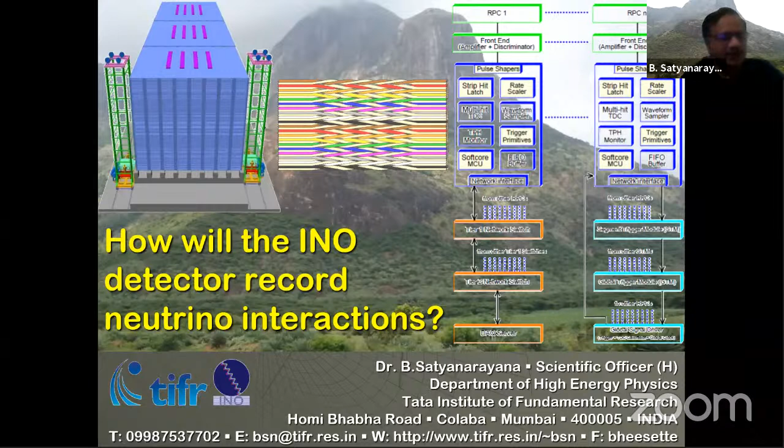Okay, so the title of my talk, as you see on the screen, is how will the INO detector record the neutrino interactions? The title is motivated because you have been hearing about neutrino oscillation, neutrino interactions, and various other phenomena. But when you really build INO, the big detector, whenever neutrino interactions do happen in your detector, they are reasonably rare and not in big numbers. So how will you actually end up recording them, how do you know that your detector is live and working to record the data, and how do you know that the detector is recording it accurately, in the sense that it's not a spurious event and so on. Okay, so that is the motivation for this talk.

What you see on the left, you will see this picture many times later, is the so-called iron calorimeter detector of the proposed INO project. And on the right, I gave symbolically some blocks of what it looks like, some kind of electronics.

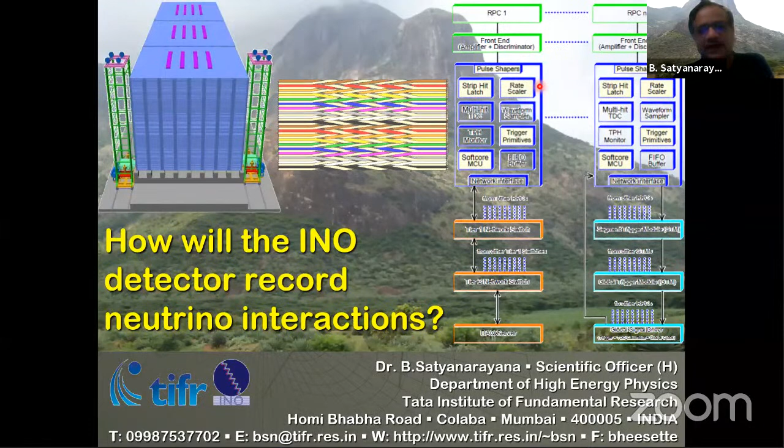And of course, this we all know is a kind of cable. Some of us call it flat cable because it is flat and there are multiple conductors. So the point is, when neutrino interactions or any interesting phenomena happen, how do you actually record them? So that is the theme of today's talk. But obviously, we must start when you talk about recording.

Of course, we should go back all the way to 1956 and look a little bit, just to get the context of how Reines and Cowan, the guys who actually discovered the neutrino in the very first discovery experiment in 1956, did that. Looking back today, it looks like a very simple, rudimentary experiment, but nevertheless, the kind of numbers they obtained with their measurements are phenomenal. Look at this at the bottom.

So of course they used anti-neutrinos coming from a reactor. So these are incident anti-neutrinos coming through this port, and this is your nuclear reactor. And what they have is a detector like this, which is made of about 200 liters of water and about 40 kilograms of cadmium chloride. These circular objects are, of course, photomultiplier tubes, about 5 inches in diameter, and about 110 of them are used.

So when an antineutrino comes in and gets into the volume, which is a scintillator volume here, you get an inverse beta decay. You get a positron here, which passes a little bit beyond in this detector volume before it interacts with an electron; they annihilate with each other, producing two gammas back to back. So this is the first event, the prompt event. This is what is given here: antineutrino with proton producing a neutron and a positron. Now, this positron with an electron produces two gammas, and you need to detect these two gammas first in order to say, this is my starting point, this is the prompt.

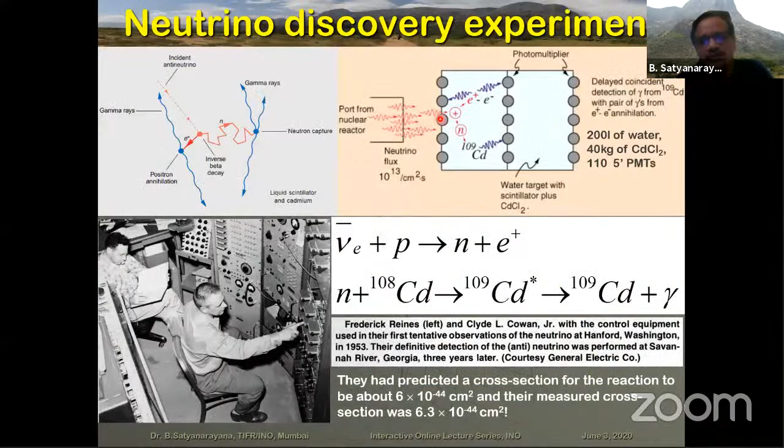So this is what I wanted to tell you. It all depends on how cleverly experimentalists put up an experiment. That is more important than using very high speed clocks, large memories and whatever. So that is the idea, but let us now come straight to decades later.

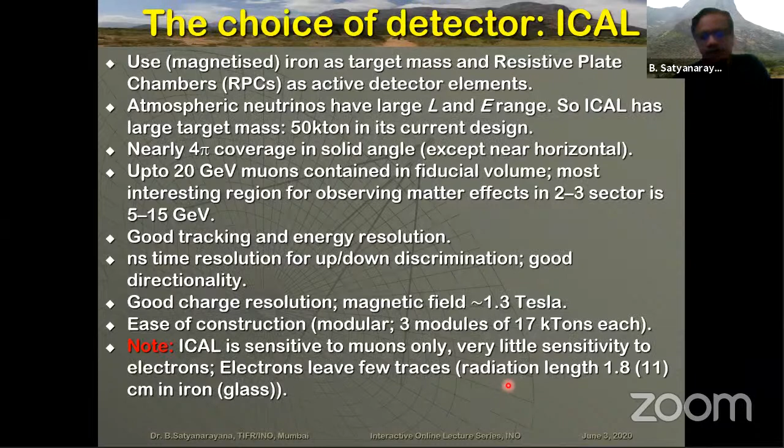So just to give a very quick overview of all this jargon that we keep talking about, the big detector, the dream that we want to build, is the iron calorimeter. So that is how this structure looks. We'll see, of course, more details about this. The so-called engineering ICAL. So before we build the big detector, we want to build a prototype which will give us confidence that we can actually build this. By the way, these are those 3 modules that I described just now. And even before that, we want to build a very tiny so-called mini ICAL detector. These 2 are, of course, in the graphics, but this is a real object that you see here, and it is actually operational in Madurai in our lab called Inter-Institutional Center for High Energy.

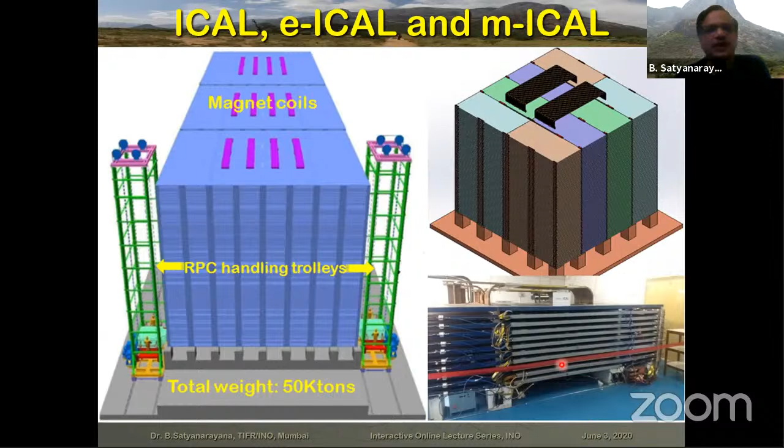So you keep hearing about these words ICAL. ICAL is the final big detector that we want to build. Engineering ICAL is what is here, the small one. You will see the specs very soon, and mini ICAL is what I said is right now operational. Just to give you a feel for what these numbers, sizes are, you can actually see a table here. Talking about the dimensions, the total dimensions are roughly 16 meters by 16 by 14.5 meters.

And you saw that it's a layered structure. There are 150 layers of iron, which is about 6 centimeters thick. There's a gap of about 40 millimeters between the iron plates where you are going to insert the active detector elements. This is the magnetic field. And Deepak mentioned the resistive plate chambers, nominally of the order of 2 meter by 2 meter size. And you'll be able to get tracks of these particles, let us say, at every 3 centimeters. Okay, you will see that the actual resolution for the position will be much better than this, because this is one track. If you send me, I'll be able to give you a position within 3 centimeters.

Okay, and of course there are other details here, but what is also important is when you say that RPCs are your main active elements, the question comes, how many of them? What is the total area that you are going to cover? Because there are 150 layers, let us say each one of them is 50 meters by 16 meters. So if I have to cover them, 150 into 50 into 16, you get 100,000 meters square of area. These are almost 15 soccer fields.

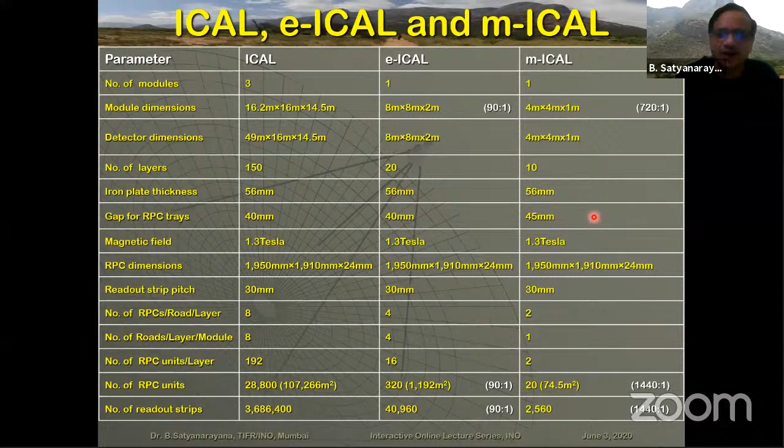And if you wonder what 4 million detector channels are, typically an ECG machine has about 10 channels on which the signals are received and recorded. So now you can kind of imagine what one is talking about. Compared to ECG signals, of course, these are about 1 million times more signals, but also 1 million times faster. So that is the kind of figure you should sink into your mind when somebody is talking about engineering, right?

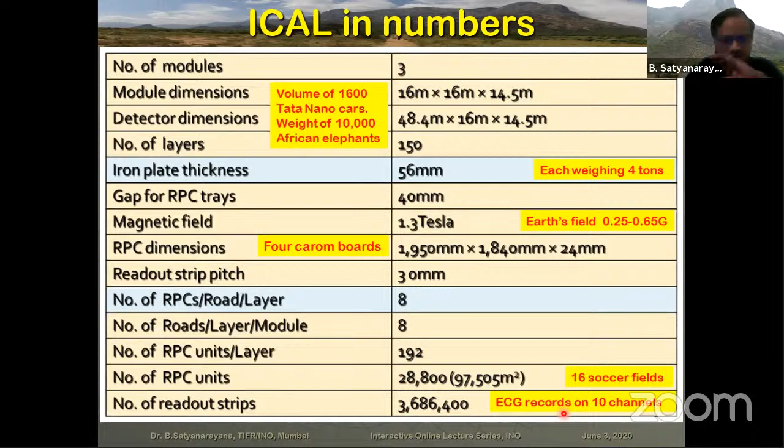Okay, let me see if I can show you. Okay, I can't find it, I don't know why, maybe I should.

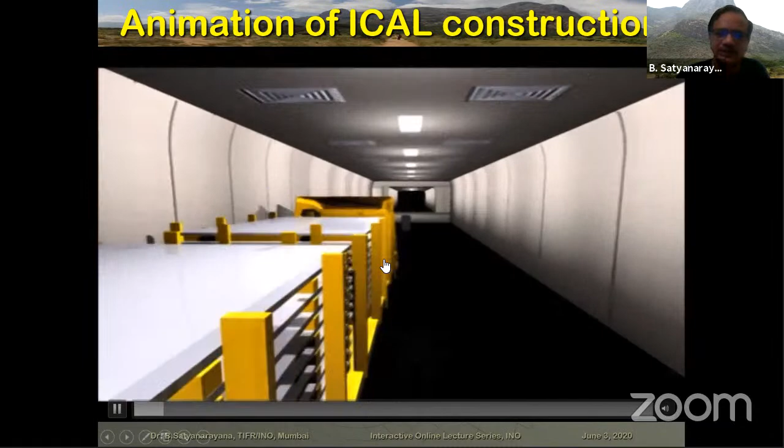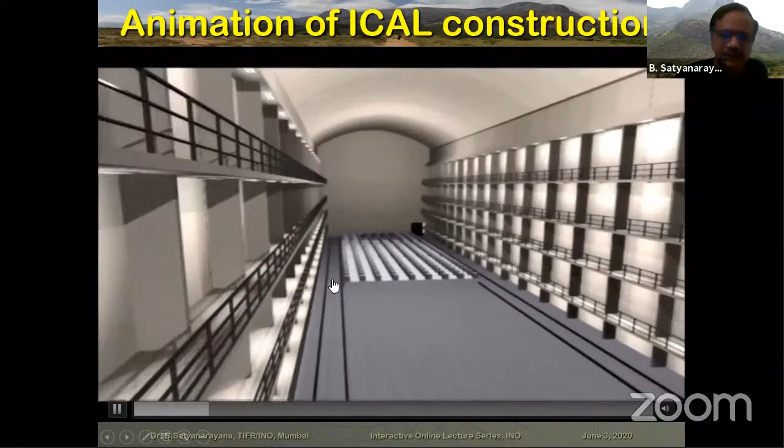Yeah, so just an animation to give you a feeling. So this is the 2.1 kilometer long tunnel, through which a truck carrying, let us say, iron plates is going, and it is now parked at the bay where it is supposed to be waiting. And now you can already see that you have concrete pedestals on which you want to build the first module and the second module and the third module, putting them together.

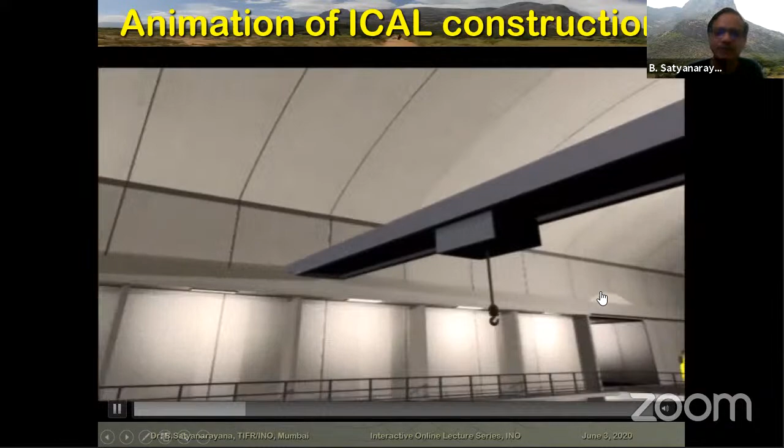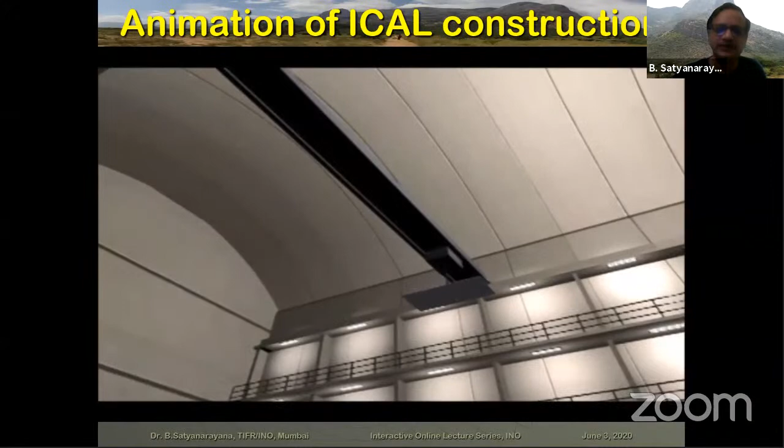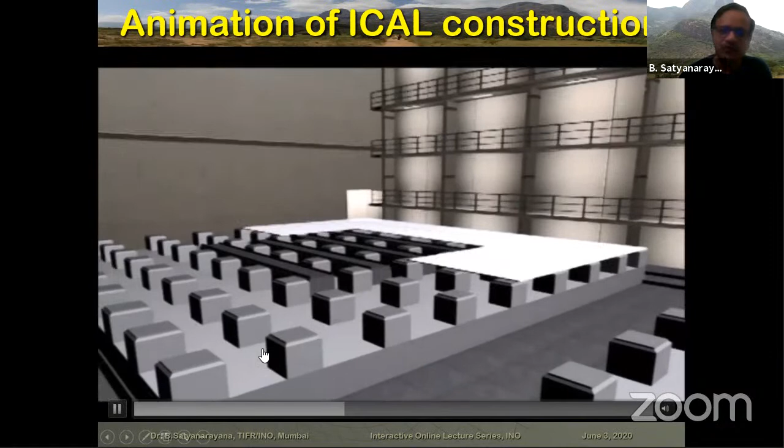And here you can see the iron plates are being picked up by a crane, and they're going to be placed one on top of the other, and it is always built layer by layer, as I said, keeping spacers between each one of them to ensure that later on you can insert the active detector. Of course, here every tile and every layer is put in a few seconds, but it takes 3 or 4 years to actually build even one module.

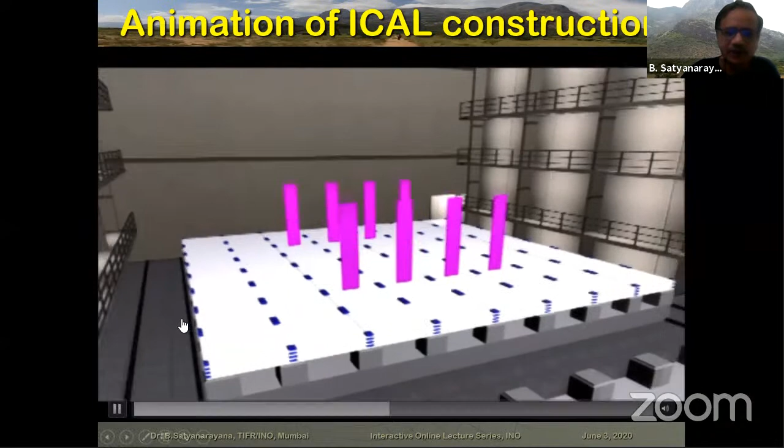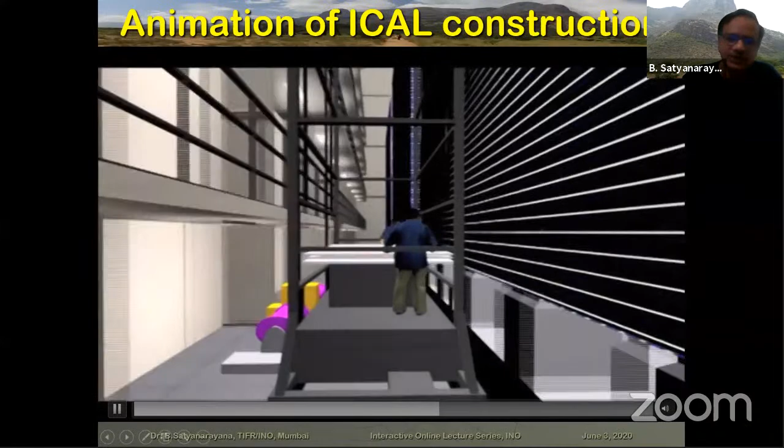Now you can see the purple color stuff, the magnet coils have already gone in, and these iron plates are special because you can kind of push the copper coils through them, and you can see very quickly modules 2 and 3 have come out. Now these guys are taking in a trolley the fully fabricated particle detectors called resistive plate chambers, and they are pushing those into those gaps like pigeon holes, one RPC at a time, and then they'll go to the next one and so on.

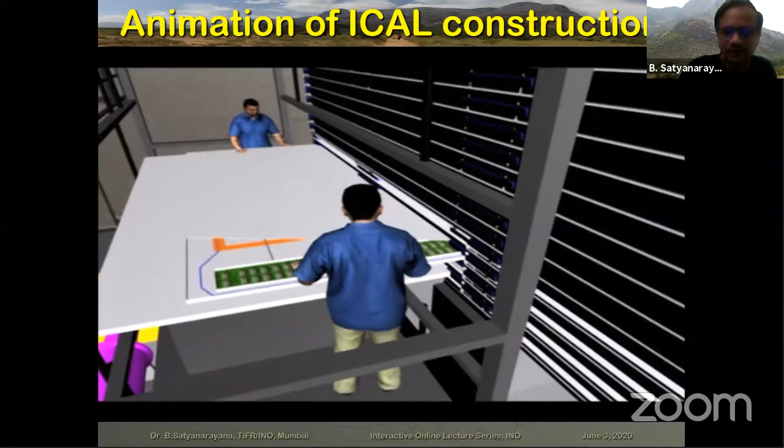Okay, so as I said, the whole animation of course lasts only 10-15 seconds, but it's a long process when you want to build such detectors. So this is what I wanted to give a feeling of, when you talk about large area RPCs you're going to use in a big number, how big this big is.

And of course, there are many differences depending on what the electrode material is. Most people use glass or bakelite. What is the gap between the glasses, how many gaps and modes, and so on. We'll talk about it, but please remember, this is the kind of challenge that you have. And the R&D started quite some time back, almost 20 years ago; obviously there was no RPC in the country and we really had to start from scratch.

Okay, what is RPC? It comes under a class of what you call parallel plate counters, which were really invented by Keuffel in 1949. This class of counters is called PPCs, parallel plate counters. And imagine, at that time he was talking about machining 2.5 millimeter gaps. This is a very classic experiment. But what I really want to show is the uncertainty in reaction time, something like a timing resolution, which already as a function of the voltage was hitting nanosecond kind of resolutions at that time.

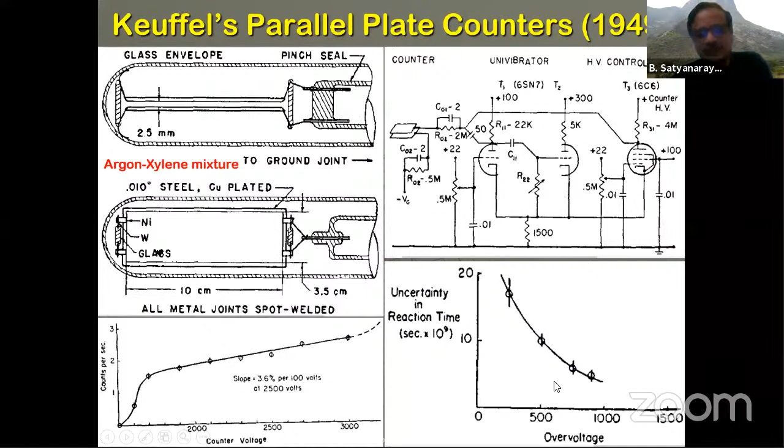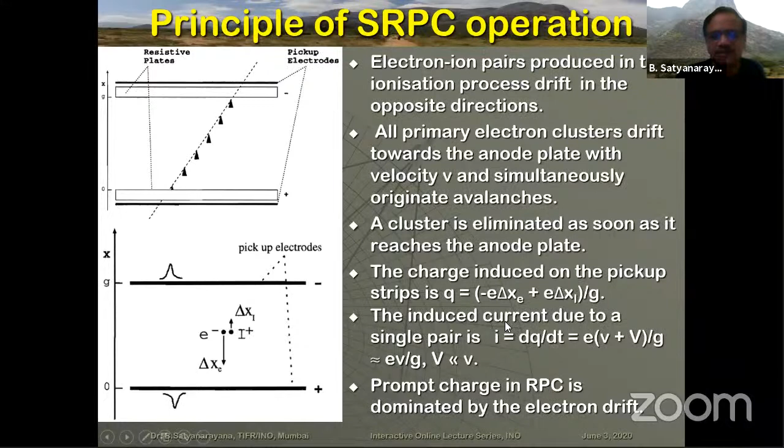Okay, so the signal that you are getting on the pickup panels is mostly contributed by electrons. A little bit about how you control this avalanche. You use, as I said, a 3-mixture gas. R134A is mainly the ionizing gas, and R134A is also an electron affinity gas, which can capture the free electrons produced, and you want to localize the electrons rather than spreading the ionization to the entire chamber, which is never a good idea, because then you lose the position resolution capability.

Now, these two reactions also keep happening. There could be electron attachment, which is given here. It could also be recombination of the ions and electrons produced, especially before they start their journey. In both cases, you will produce photons, and those photons can induce streamers if you don't contain them properly. So isobutane is used to kill these photons, especially high energy photons, so that they don't produce further ionizations laterally in the gap.

And SF6 is used to contain the gain of the detector, so that the streamers are avoided. So these 3 gases you use in some proportion, which you have to study to optimize, such that you get good gain. At the same time, you also avoid streamers, because they can spoil the longevity of the detector as well as the position resolution.

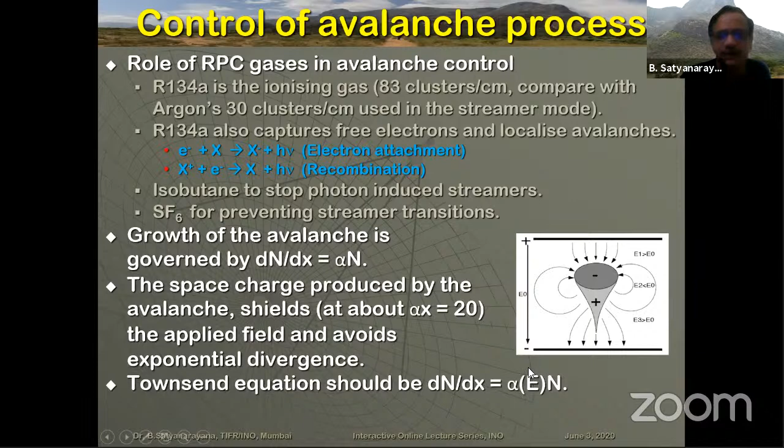But depending on whether you are close to the electrodes or close to where the electron cloud is moving, the fields are quite different: in this area it is larger than the uniform field, and at the center it is slightly smaller. But you don't want to reach either limit, and you want to maintain the avalanche growth in such a way that it doesn't turn into discharge. So the Townsend equation, though we say it's alpha n, alpha itself depends on the field. So you may have to write alpha(E) n.

Now, the same RPC that we have described can be operated in the so-called avalanche mode, which is a proportional, semi-proportional mode, which means I operate the gas mixture and high voltage such that when ionization takes place, as in the picture I described before, the avalanche starts moving. When the electrons move to the anode, you can see that you start neutralizing a very tiny place here. The ions reach much later, and when they reach the cathode, some of this local small area gets neutralized.

When that happens, the field which was at the applied uniform field drops suddenly, and you will find that the avalanche stops. Now, the electrostatic flux inside is varying, because one is the uniform field, and the other is the change of field produced by the movement of electrons here. That change in electrostatic flux is what induces signals outside the electrodes, using Ramo's theorem.

Now, in the avalanche mode, the signals induced on the pickup panels are relatively small, of the order of about 1 picocoulomb. And the gain, compared to the number of primary electrons, the total avalanche, is of the order of about 1/10 of a billion. These are good in that the charge is less, which increases the detector lifetime, but the signals are small, so you may have to use amplifiers outside, and this is the typical mixture and so on.

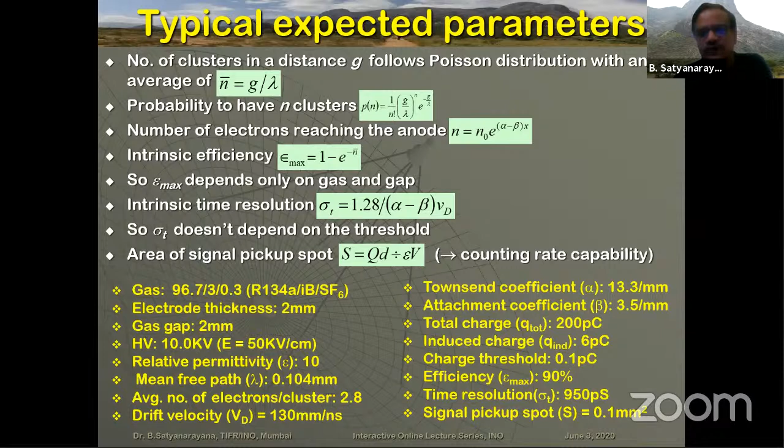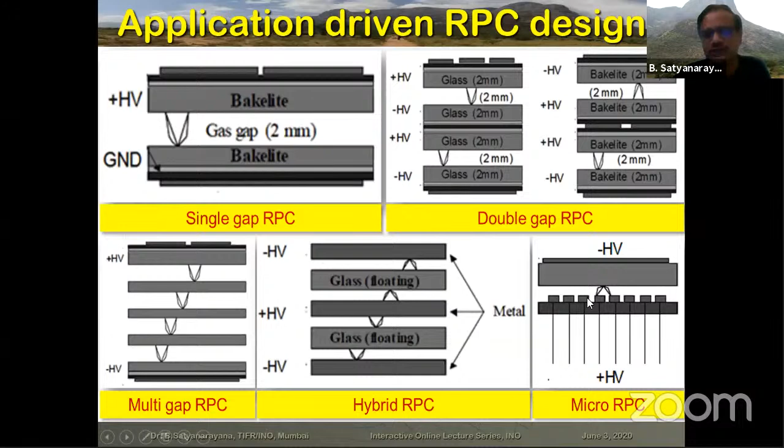You could also make the so-called hybrid. Instead of using glass electrodes, you could also use other metals. And there is also the so-called micro RPC, in which you make one of the electrodes segmented, and then you can get much better resolution. Maybe you can use it for X-ray detectors and so on. This is called micro RPCs. These are some geometries. How do I make an RPC?

You want to maintain the gap very uniformly, because when you apply voltage, the field depends on the gap that you are maintaining between the electrodes. And if the gap is not uniform, you will get different fields at different positions, which means the gain is not uniform across, right?

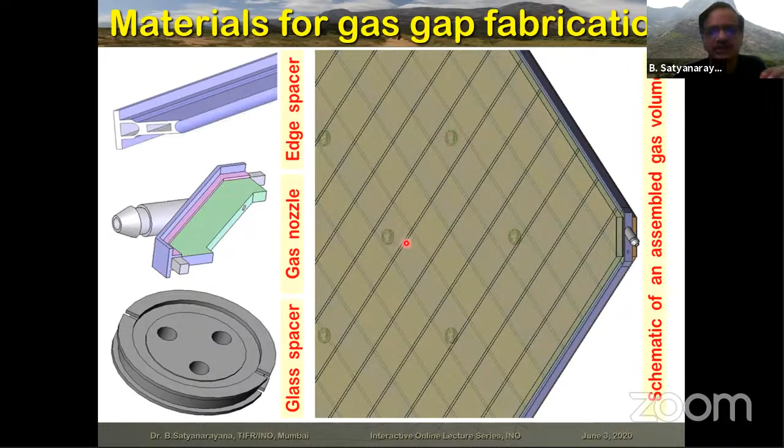So when you make the actual RPC, in this cartoon you can see these are the spacers that cover all four sides. These are the gas nozzles, and these are the buttons which are inside between the two glasses, right? I'm just showing you how they delimit the space between them.

Now, I mentioned some time back that the panels placed outside the gap are the pickup panels, which allow you to get the signals. You can see each one of them is roughly about 3 centimeters long. So as I mentioned, you put one such panel, let us say, on the top in this orientation.

At the bottom of the gap, you put one orthogonal to this, so that you get a pixel of 3 centimeter by 3 centimeter. When a charged particle passes through, you will be able to get such kind of resolution, right?

Okay. Now, when you build it like the way I've shown, you take glasses, you put them together, you put the spacers around, and you put the pickup panel on the top, and everything is put together. You put the electronics that is required to pick up signals from both fronts. You can call this the X plane, and you can say this is the Y plane.

And so this is a completely assembled so-called 2 meter by 2 meter RPC, and my colleague in Madurai is giving finishing touches before he is going to push this into a stack here. Okay. So, but it of course takes a lot of steps and a lot of care everywhere.

Now, when you put on such an RPC, you will see beautiful pulses like this. These are actually already amplified pulses, but you remember, this is the kind of voltage that you are talking about. This is already amplified to close to about 60 or 70. And the scale is about 20 millivolts. So you have roughly about 6 divisions, about 120 millivolts, but divided by 100 roughly. So it's about a 1 millivolt signal that you're going to see.

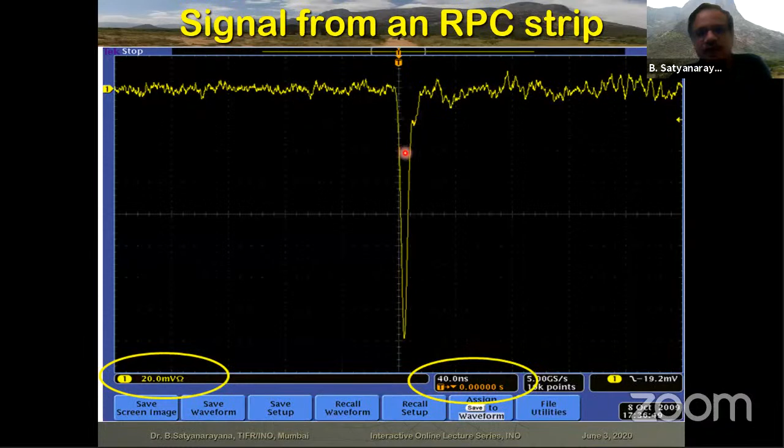And of course, you can happily track charged particles which are all available to you, which are cosmic ray muons, which just go straight through your detector. And as they pass through each one of the layers, your RPC, if it is 100% efficient, you're supposed to get a point there. You will see that.

What did it give you? Several years of running of all these prototypes gave you confidence that you not only understood how to design an RPC, but also their long-term stability. This is the most important. Remember, the ICAL experiment has to run for decades. Okay, so only when you're confident such a detector works very efficiently as well as for the long term, will you be able to install it for a neutrino detector.

Of course, when you build a detector as a student or a faculty, you are supposed to also look at whether each one of these parameters is working. For example, there are what are called IV characteristics, just like a diode. For example, if you construct an RPC detector the way shown, there is a glass here, there is a bottom glass here, there is a gap here, and if I apply voltage here,

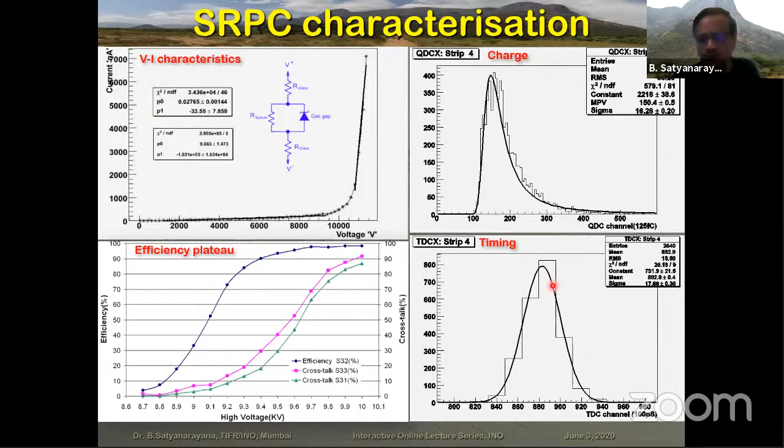ICAL detector. And as we said, the most important parameter for using RPC is also the timing. We should be able to discriminate whether it is an upgoing or downgoing particle. So I want to look at a cosmic muon telescope and see, with reference to a reference given by a scintillation detector, what is the spread of the timing that I see on the RPC? And I want to see this at least of the order of 1 or 2 nanoseconds, right? Okay, so all these parameters I need to do. You need to go even more.

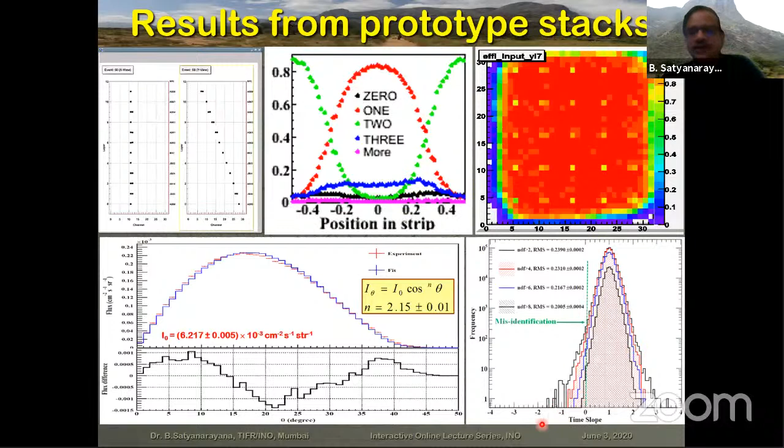I can also go ahead and try to see what is the cosmic ray flux, even using such tiny modules, and you can see these numbers come quite close to what is actually given by standard big detectors that were built. Since the main idea is to get the up or downgoing discrimination, on the surface, of course, you'll always see cosmic ray muons going only from top to bottom, and you can see all this coming only on the right side, and very little on the so-called misidentification. Okay, so this is what I'm trying to show.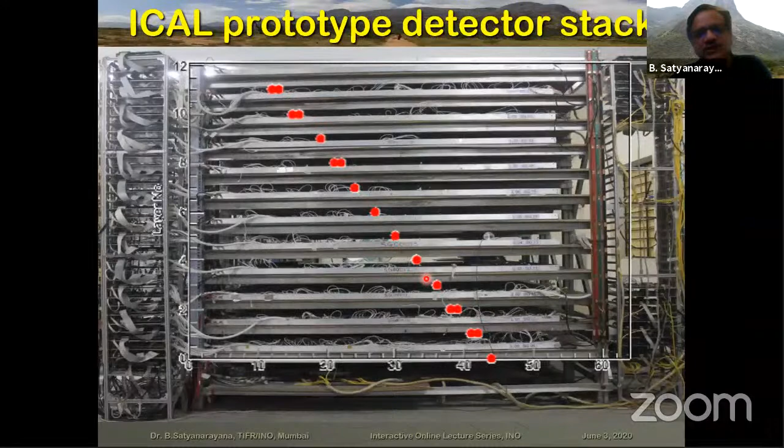If you have such a detector, in each of the stack, each of this layer, you're going to see one point, which is telling you the trajectory of the cosmic muon. Now, if I take each RPC for a long time, and if I project such particle trajectories, I can see something like what is called a tomography, and you can clearly see these white spots here are the dead regions, which are caused by the spacers that we use. Otherwise, you can see each of the strips, which is 3 centimeters, and there is a gap of 2 millimeters in between. It's very nicely visible.

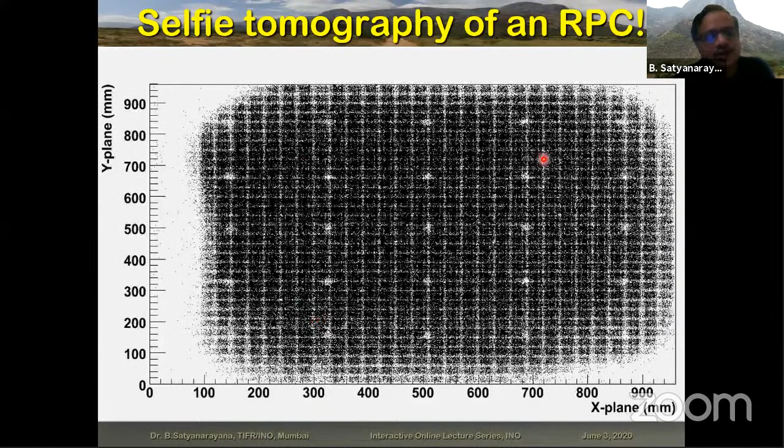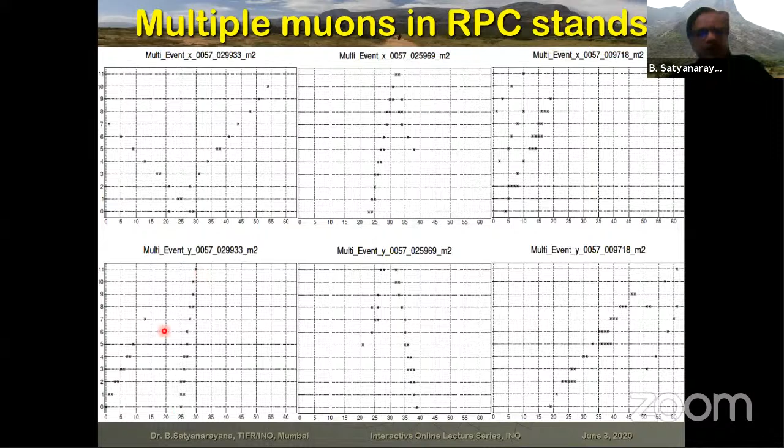Even with such a small detector, you can actually track cosmic muons, multiple muons within about a 1 meter by 1 meter detector, and you can see they're beautifully tracked. It's not just single muon tracks, but even double. RPCs are very good for detectors like ICAL, because you need very, very large area and very thin detectors, because they are only about 10 millimeters thin. And of course, with material, etc., it will go to about 25 or 26 millimeters.

And they're a very flexible detector. I can design the geometry the way I like. I can do XY, I can change the pitch of the pickup panels and so on. I can use the same RPC for tracking, calorimetry, as well as muon detectors. I get excellent timing, as I told you, and they are all built from simple common materials.

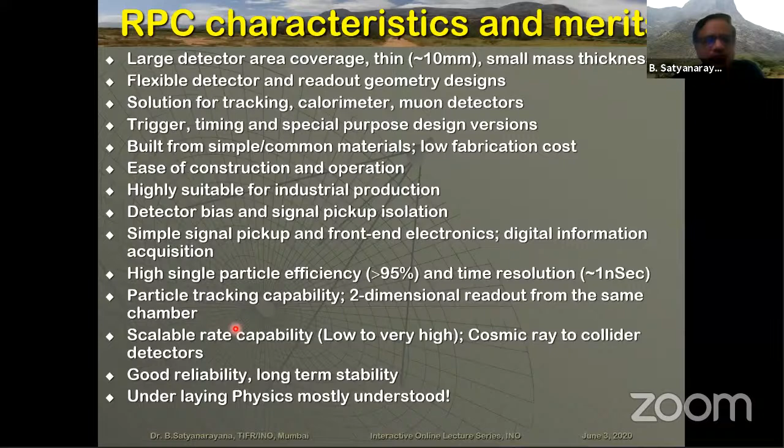Remember, high energy physics detectors are very large in number, very high in count, so you can't really build with very expensive materials. It's very easy to build, as you saw, and very suitable. Ultimately, you don't build 30,000 RPCs in your lab; you have to build in industry. And there are many other nice characteristics. I don't want to go into them for want of time, but RPCs are really nice, suitable detectors for such a detector.

Of course, since RPCs are based on gas as the detector medium, you also have to build so-called gas systems. Gas systems are the units which take those gases in cylinders, mix them in the proportion that you want and flow them through the RPCs. But remember, if you build the big ICAL, it will require about 200,000 liters of gas, and you can't really throw the gas into the atmosphere.

Of course it's not allowed, but even if it were allowed, it is a waste of money, right? So when the gas is mixed together and flown through your detector, after all, it is only used as a detection medium. It is not something consumed in that sense. So take the gas out and maybe clean it a little bit, because due to leaks and going through the pipes, etc., there may be some little contaminants, moisture, oxygen, or water.

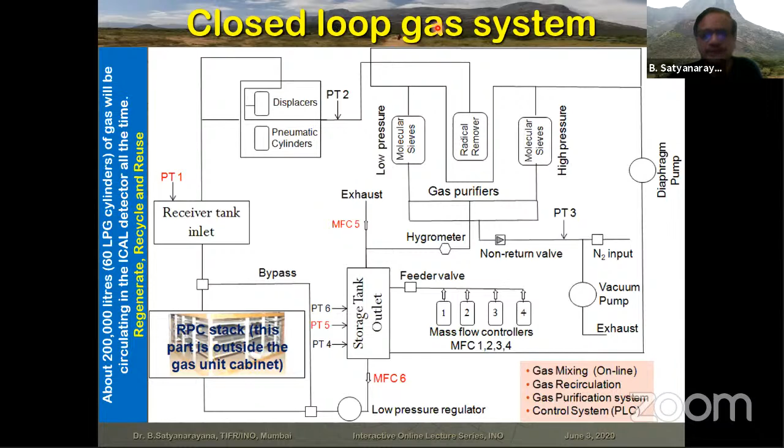Purify it using molecular sieves and other materials and push the gas back. So you will be using only a small percent of new gas every time. And this is what we call a closed loop gas system, and that is what has been developed. Now I'll skip some of these plots and slides because of want of time.

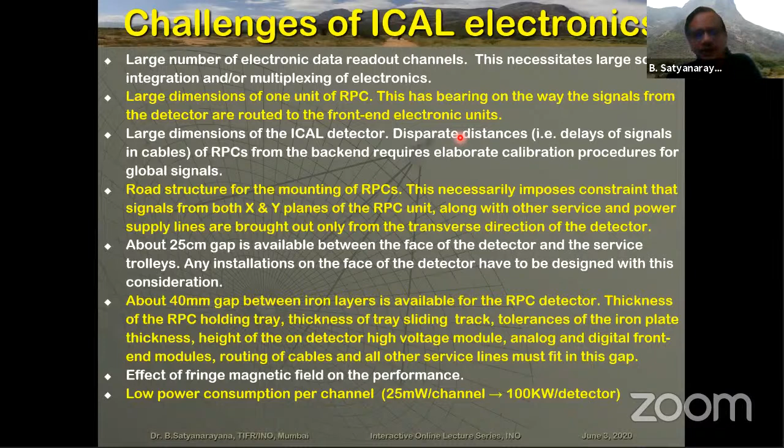Now I want to tell you a few things about what is required in terms of electronics. Remember, when you have a stack like this, what you are essentially asking is to see the path of the charged particles that are passing through. So suppose this is your ICAL detector. If I see either muons passing through or a neutrino coming in, interacting and producing, let us say, muon charged particles, you want to track them.

To track means, as it is traveling, you want to see the X coordinate, Y coordinate, and Z coordinate. Of course, the Z coordinate is given by the layer; you remember we talked about 150 layers, right? But X and Y are given by the pickup panels, which are orthogonal to each other. So the information I want is, at every level, which is one Z coordinate, one X and Y, another X and Y, and so on, so that you will be able to do a fit depending on what you want to do, with magnetic field or without. So this is one piece of information.

The other piece of information: as the particle is passing through, we should be able to get a time stamp, which means with reference to the passing of the particle, at what time the particle entered each layer. If it is in increasing order of time, then I know this particle is going from top to bottom, and if it is the other way, it is going from bottom to top. So I will be able to give you directionality capability.

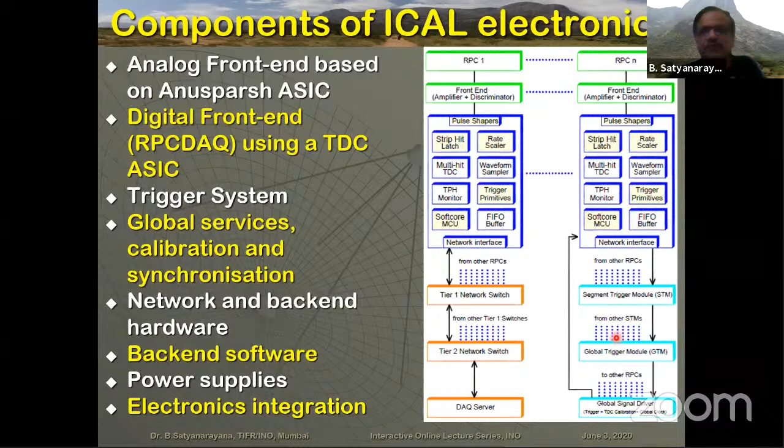But remember, you also have to generate what is called a trigger. Trigger is a system which is telling you when to record data. Otherwise, there may be a lot of other spurious events. You don't want to trigger them. And this is the most important system. So you need to also build an electronic system which is going to decide, based on the track of the particle or the topology of the hits, whether this is an interesting event or not interesting, right?

This is the electronics. So first things first, there will be students who will sit down and say that, okay, these are the requirements that I need. This is the amplification I need. This is what is required for my detector. And they make a block level diagram. Say I need an amplifier here. I need a comparator because I want to convert an analog signal into a digital signal, and so on and so forth, a multiplexer and so on. So this is the basic drawing that is required.

Very simple textbookish drawing. But what is important is, unfortunately, you can't go to the local market and buy an amplifier for you. Because the signals are very small and very fast, such very high bandwidth ICs or op amps are not available in the market. So some of our students go and sit and design what they call application specific integrated circuits. Starting from very basic electronic circuitry, they actually go and design this chip by themselves, okay?

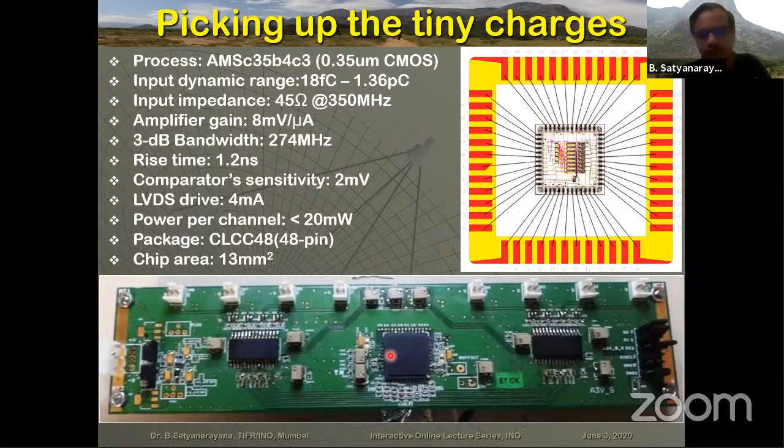And then we go to a foundry. Unfortunately, we don't have good foundries in the country. We go out somewhere, maybe European foundries, and get these chips fabricated. So these chips that you see here are not bought in the local market, but actually designed by the collaboration and manufactured in an IC foundry. Now you can really see there are a large number of such chips which are produced by INO within the collaboration itself, okay? Initially, we started with some hybrid chips. Now they are called ASIC chips, both for analog, for amplifiers, etc.

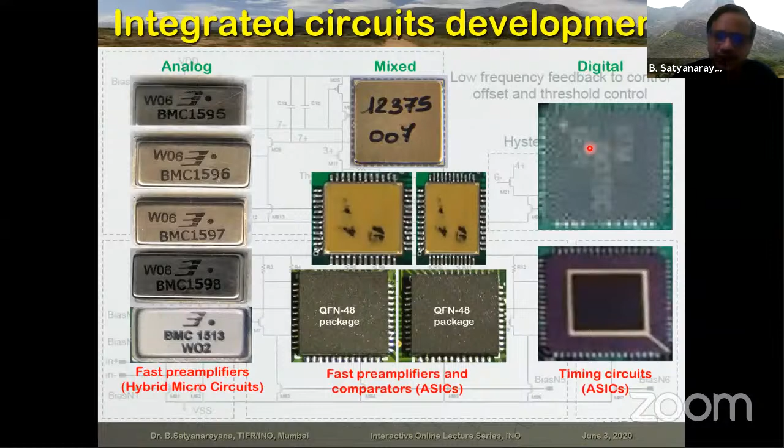So I should be able to measure this T1 here. I should be able to measure this T2 here and say the time difference between them is T1, which is this total pulse here, and T3, and then minus T2, right? Because you don't want to count that extra one. It looks very classical and very simple. There are many configurations and many ways people can build so-called digital application specific integrated circuits. One that you see is here.

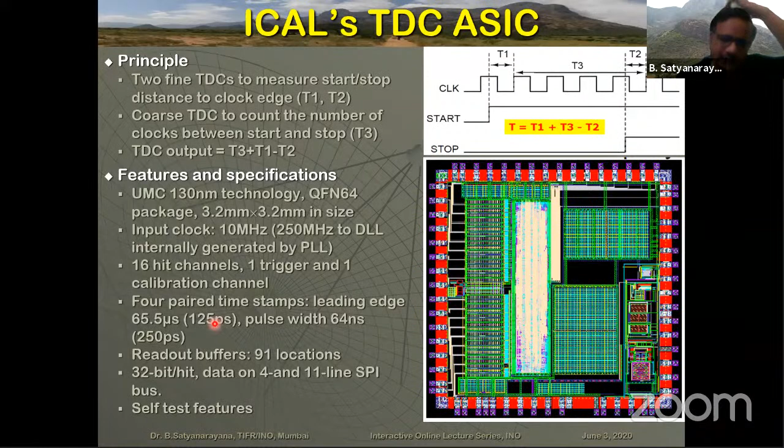But just remember that what you are actually asking is to distinguish something like 125 picoseconds resolution. So you are measuring this difference at a level of 1/8 of, let us say, a nanosecond, okay? Which is very important because that is what gives you the capability to give a directionality of this signal. So this is again produced in the collaboration.

Now, another thing before I quickly go out of this electronics: we also heavily use what you call field programmable gate arrays. They are like circuits which come to you when you buy them with no circuit inside. You can decide what circuit you want to put inside, and then download it just like the way you download a program from somewhere. And that field programmable gate array becomes a digital circuit all by itself. And then you can start using it; you can put a lot of complexity inside. You can even put microprocessors, microcontrollers inside, and so on and so forth.

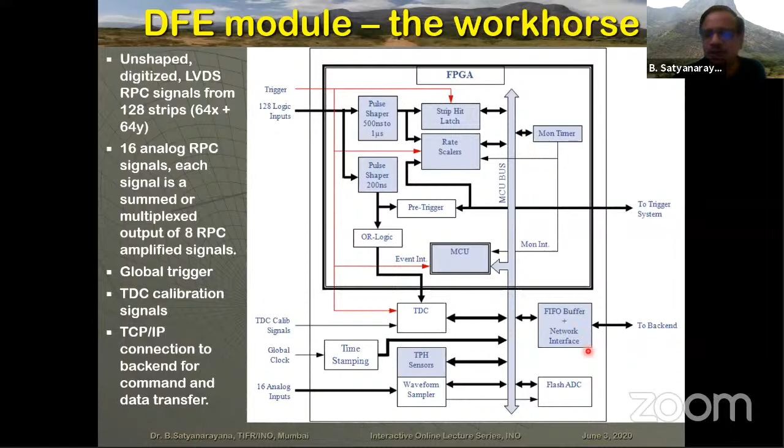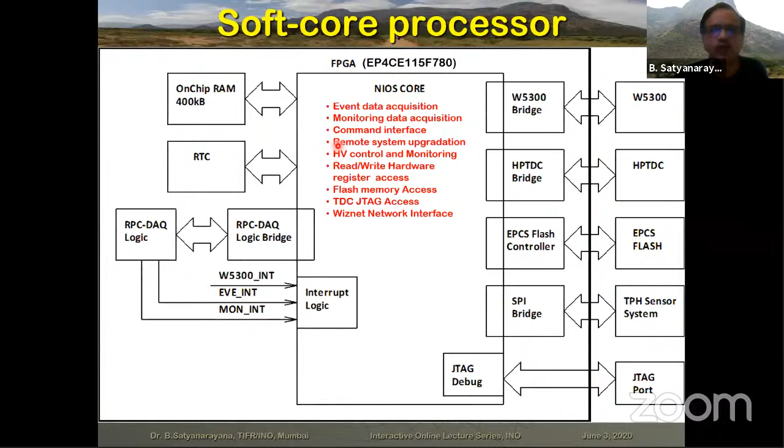Okay, so such kind of a big, modern field programmable gate array onto which you put all the digital logic inside, the time to digital converter here, and then the data that is digitized is actually coming through a network, which I will show in the next slide. Okay, and everything inside that field programmable gate array can be programmed. So somebody can actually write whatever data acquisition software they want.

And when you build the entire system, it looks like this. It is a very funny looking triangle-like board, because you will see soon why we need to take very small space for the electronics, because you want to get good area for the detector active volume, right? So you see this vertical wall in which the entire signals from one RPC are getting in.

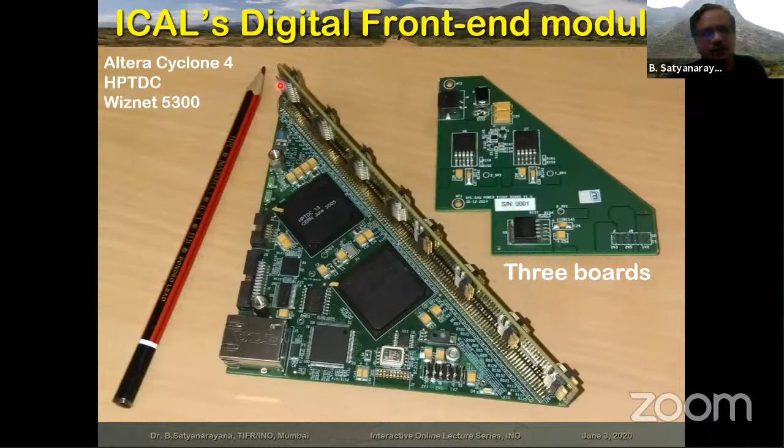This is the time to digital converter where you measure the tiny time differences. And this is the field programmable gate array into which you put all the electronics that you require. The digitized data will come through this chip and come through this connector. This connector, you will be familiar, it is the same as your Ethernet connector. And this board is supplying power, which will go on the top of this. Just compare this with your pencil size. It will tell you this is just about 10 centimeter by 10 centimeter, that too a triangle, right?

Why such a small thing? Now you compare. This is your RPC, which is 2 meter by 2 meter. In that area, you're only occupying this little space for the triangle here, and this little space for the power supply, which produces the field. You want to produce a uniform field, so you apply high voltage here. The rest of the area you want to keep for the active detector volume. So this white area, everything is active.

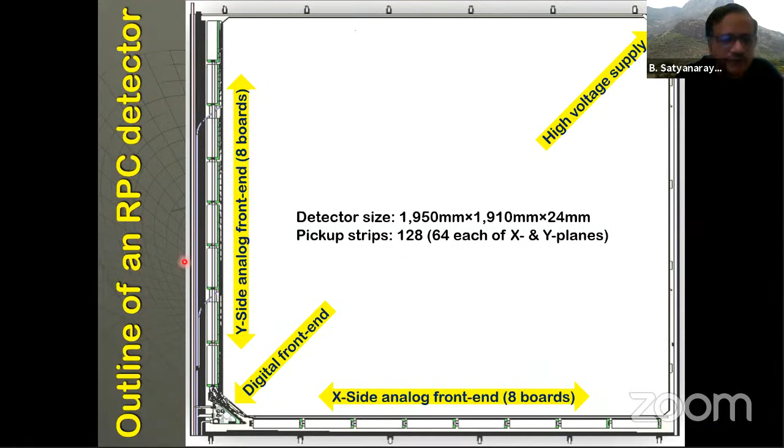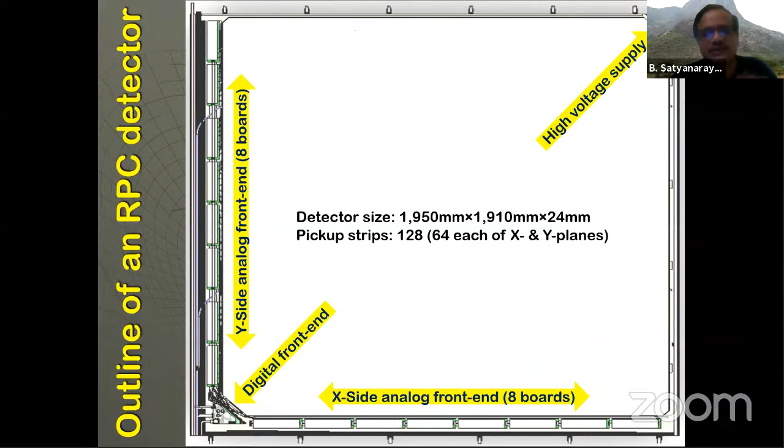This is the top view of an RPC. Of course, you can see the amplifiers that we talked about for the Y side marked here, and for the X side, these rectangles are here. So those are the only areas which are so-called dead area. The rest of everything inside a big RPC is maximized. Okay. I want to quickly go to an important system. I hope I have.

Can I take about 10 minutes, Deepak? All right. Yes. Yes. Please.

Okay. So of course you want to detect neutrino interactions that are taking place, right? So depending on whether they are charged current events or neutral current events, you typically produce, for example, muons, which produce long tracks inside the detector, and they go through many layers of RPCs. So that is one way of detecting them. The other thing is hadrons; they don't go through long tracks because you are using very thick material. So they might actually shower out and be confined to only a few layers.

So when I say that I am looking both for charged particles, muon-like particles, as well as hadrons, I should have a strategy where I should be able to track them, or recognize them inside my detector volume, right? When you want to estimate the neutrino energy, for the muon, of course, it is easy because you have a magnetized detector, and you have XY coordinates for each one of them. You reconstruct and get the tracks. From the track, from the magnetic field, the radius of curvature, you can get the energy.

Whereas for the hadrons, you actually have to see how many such pixels got fired, and from there you may be able to get the hadron energy. So it is obtained indirectly. So the choice of the so-called trigger criteria, whether I'm talking about charged current events, neutral current events or muon-like events, is dependent only on the hits that you saw. What is the hit pattern? We don't use any other information.

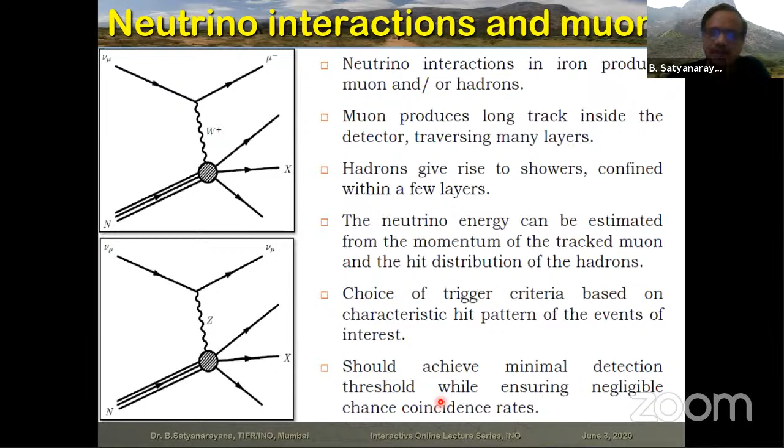Obviously, I want to have a very minimum detection threshold so that I don't miss neutrino-like events. At the same time, if my threshold is too small, then I get a lot of chance coincidences. Chance coincidence is where, just because there are random signals coming from the detector, a combination of them produces wrong signals, which I should avoid. So how do you produce the trigger?

Some signals are produced right in the RPC detector itself, and they are called trigger primitives, so-called level 0. Some basic decisions about whether or not this is useful are produced right at the RPC detector element. And a segment is a part of the ICAL detector.

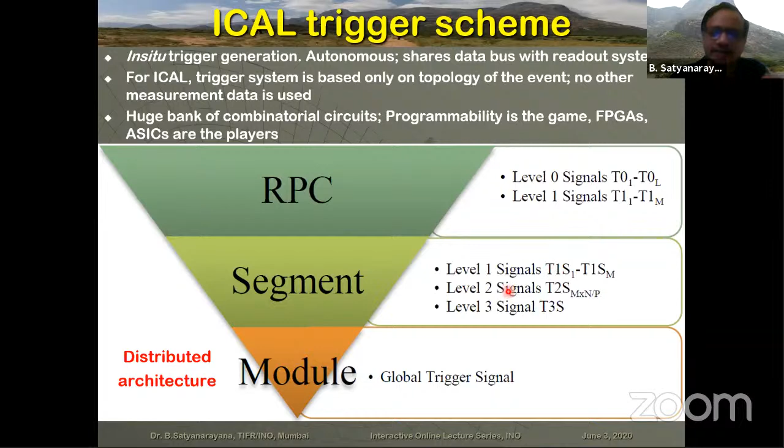So these signals go to the segment level, where higher decisions are taken, and finally the global trigger is produced at a module level. For example, if I say this is my track, it is passing through 6 layers. And if I say that out of 6 layers, at least 5 layers must have at least one hit, that is M cross N by P.

You can see that I'll be able to pick up all of those muons which are passing through, because they typically hit one. But I'm also taking care that once in a while one of the detectors might be inefficient. So I'm not asking 6 out of 6, but let us say 5 out of 6. But let us say somebody is looking at hadronic kind of interactions. If I say you look for 4 out of 6, but let us say 2 hits, it doesn't generate a trigger because only 1, 2, and 3 of them have 2 hits.

In some cases, if it is confined to fewer layers, then I have to generate another condition, maybe 5 out of that with 2 hits. Then I'll be able to get more shower-like triggers, and here more muon-like triggers. I have to really decide and put all those conditions in these various combinations. It's also important, when you choose your trigger criteria, that you don't want to generate spurious so-called chance coincident triggers. So you have to be very careful about those things.

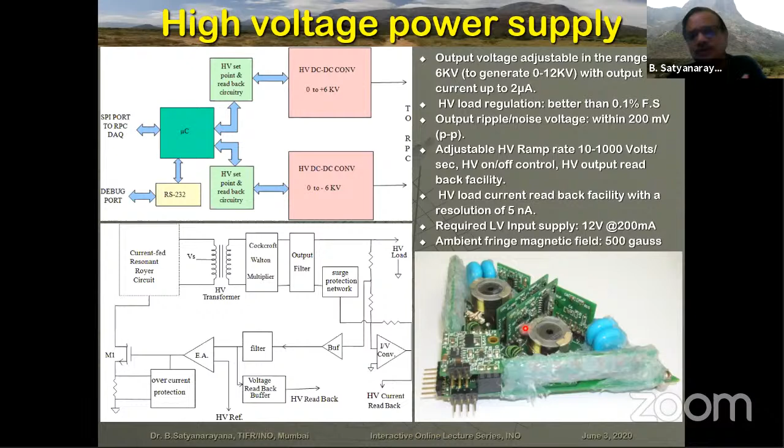This entire unit is also designed and fabricated, and we need 30,000-40,000 of them. Even power supplies have to be produced to the required specifications. You don't buy. So you can see a big collage of all the developments here. And as Deepak said, the RPC story in India started in 2001, September 28.

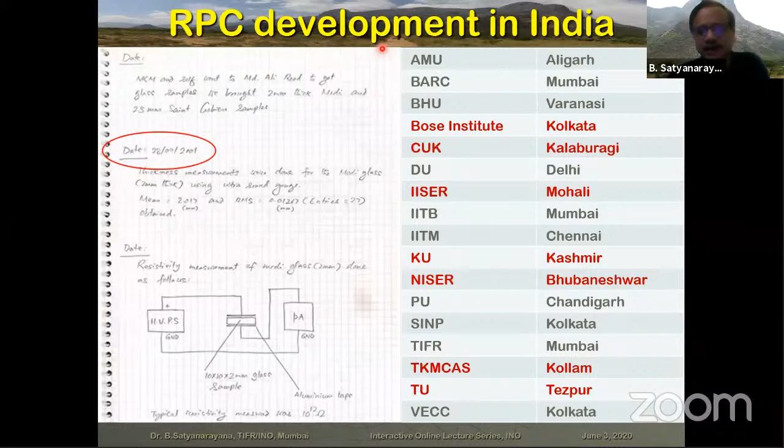Of course, when you start RPCs like this, which you build and characterize in the lab, you have to also go to industry and fabricate them in large numbers, right? So, for example, many methods that I was telling you, saying that you paint, you put a graphite coat on that so that you can apply voltage and so on and so forth. How do you do it? You can't take a brush and start painting. So you have to actually make such kind of gadgets which should be able to paint on a glass. This is a 2 meter by 2 meter glass. You can see how easily it is able to paint X and Y positions.

You can also paint it using what is called screen printing. You can see this is 2 meter by 2 meter glass which, in a glass industry, is actually being painted and cured, and also the measurements are made on this. And some of the students actually do projects, depending on what is the resistivity of the paint that I've shown here: what is the kind of pickup or crosstalk that is going to happen from one channel to another channel? This is very important.

You can see a result here, which tells you how fine the pickup strips are that you will be able to use. For example, initially I said 30 millimeter wide strips, but if you go down to 3 millimeter wide strips, you can actually get a 0.5 millimeter resolution. If you use 5 millimeter pickup strips, you can get 1 millimeter resolution. So this is what you can actually get subsequently after you get the basic raw data. So these are the kind of studies the students do.

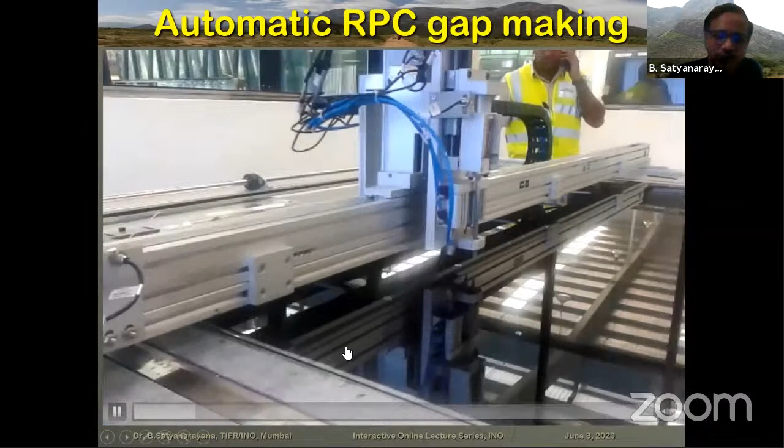After you get the glass, of course, again, you don't go and make things the way you make it in the lab, everything manually. Build a robot to do that. So you can actually see that there is a glass sitting at the bottom, and these buttons, if you remember, I mentioned to you, they're all placed here, they're glued here, and this machine goes one button at a time, placing them, putting glue, and so on and so forth, right?

And after you build the entire gap, of course, you should also ensure that it is all leak proof. And another student actually built this system using an embedded system. Nowadays people use Arduinos and Raspberry Pis and things like that, and it's a very beautiful system which can find very, very minute leaks in the full gap of 2 meter by 2 meter by 2 millimeters.

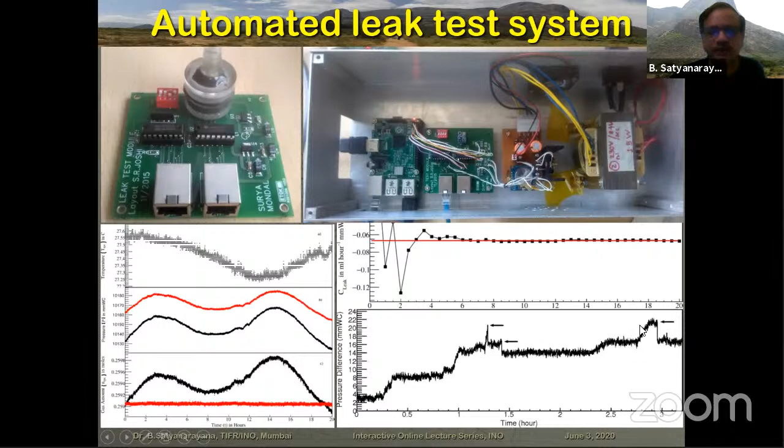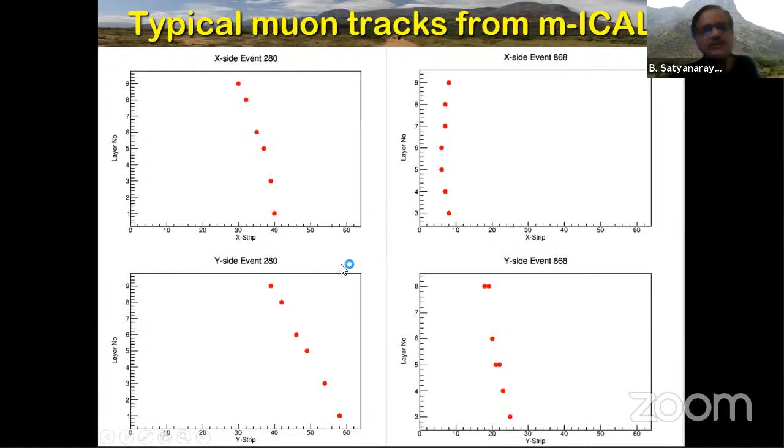Okay, so you can see it has every component that is required for a big detector, except that this is about 4 meter by 4 meter and only about 10 layers here. But every single component of RPC is actually demonstrated. And you will feel very happy when you magnetize such a detector and see the cosmic muons. Of course, this is on surface, and the bend, and students working on it are able to look at the momentum. When they can calculate it for these muons, you'll feel very happy that the whole detector is working the way it's working, and now scaling up in industry is what is required.

So I'm sorry I took a little more time. I just want to end by saying, development and characterization of very large area glass RPCs is actually completed. It's a very, very exciting journey. And they're, of course, now being produced in multiple industries, especially glass industries.

We also build closed loop gas systems. And I showed you, now for the bigger detectors, of course, you need to scale it up. And all the electronics that I very quickly went through are actually designed, and now we are waiting for them. Prototypes are all limited quantities purchased.

And the detectors and electronics, which are actually being used in many, many ICAL prototypes, I've shown you 4 or 5 prototypes, including the mini ICAL, which I showed you last. That is what is giving you confidence that the whole system, when it is put together, really works.

So useful experience gained, and a number of problems which we identified during the mini ICAL operation itself. That is very useful, because when you want to scale 20 to 300, 300 to 30,000, this experience becomes very important.

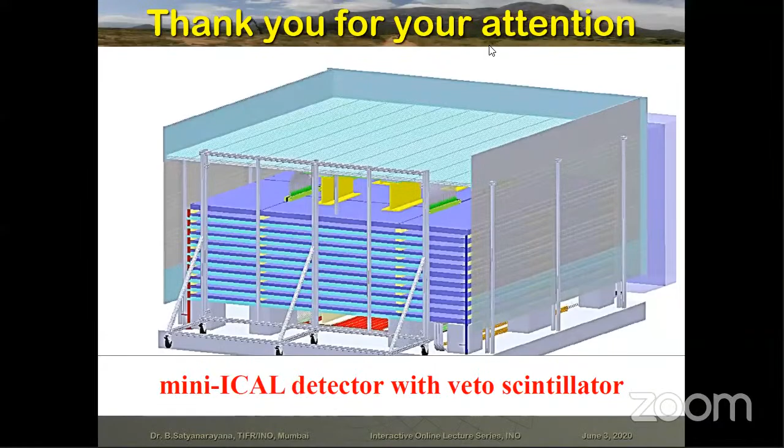So, hello. Yeah, we can hear you. Yeah, I have a couple of questions. In the Cowan-Reines detector, they had delayed coincidence, which proved to be a better technique to remove other possible background events. So is there a similar possibility for ICAL where there could be some other delayed coincidences?

Well, it all depends on what detector you design and what is the process that happens inside the detector, right? So what kind of technique you want to use very much depends on the detector technique itself. There you use, let us say, the prompt photons and then the delayed neutron captures, right?

So for them, you can't say that if you capture only the 2 photons that are coming out you declare them as an event, because that could always happen through many other processes. But when you actually tag them together, you are nailing down that this is the process that happens in my active detector volume and this is how I detect it.

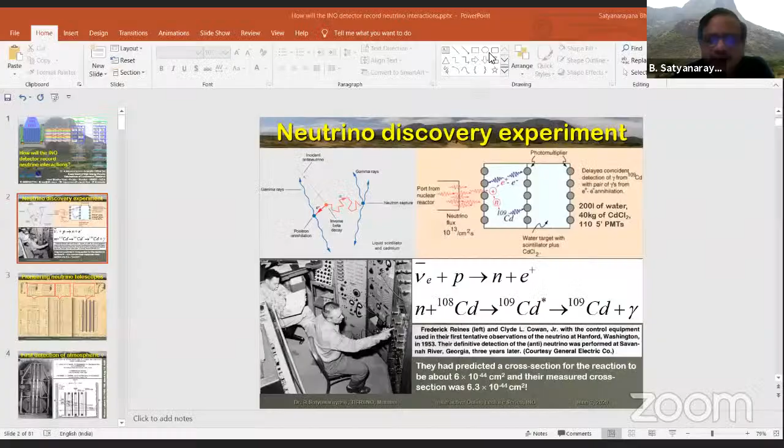what is track A and track B in the KGF experiment? Where is the neutrino interacting? Neutrino, okay. So it's coming from the rock, which is I think a meter or so off. Okay, and the track that you see up, I don't know if I should show. Your screen is not shared. Can you see it now? Yeah. Okay.